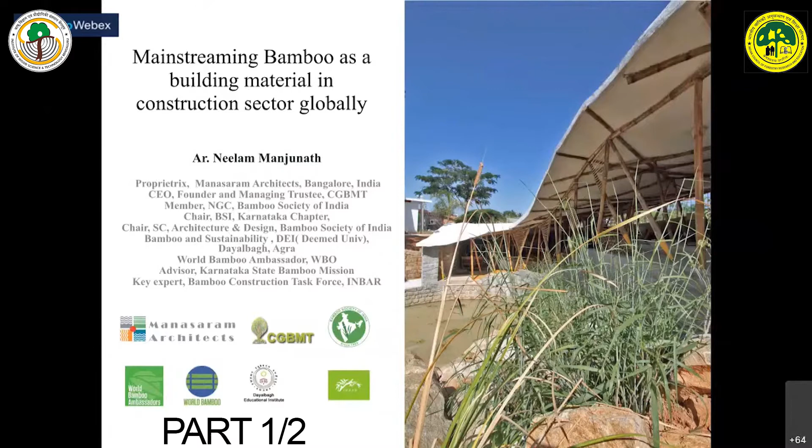Thank you. As Bansal sir said about the ecological and other benefits, the important thing is that bamboo is a traditional material, and we have been using it. Even now, about one-fifth of the world population lives in bamboo houses, though more out of compulsion than choice. Due to this, most of these traditional technologies have got lost. With the renewed interest in natural materials, bamboo has come up as one of the best alternatives and candidates for global construction, as we are all aware.

Any countries, when they show their skyline, show Manhattan skyline, or we show the Dubai towers, all that comes from concrete and steel. Unless until you count in metric tons and millions of metric tons, you are not considered developed. That's generally the general definition.

And because of that, this interest in bamboo has come. One more aspect which has happened is that most of the research on bamboo actually remains in the lab, as end-of-March projects where you have money left, you just do something, and then after that there is no interaction.

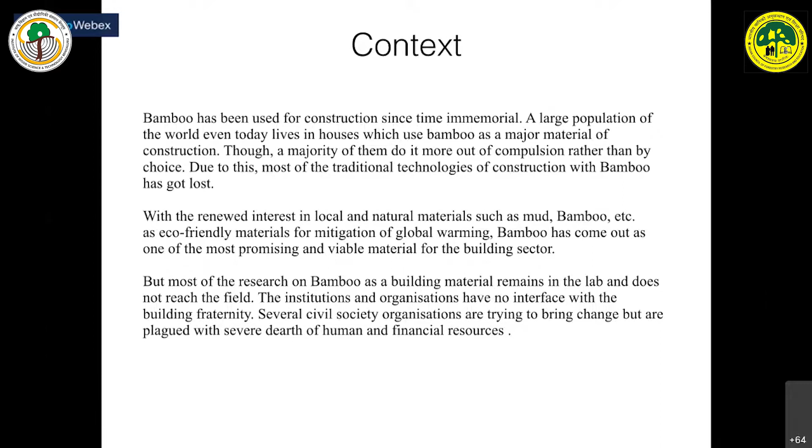When Bansal sir started, we started doing that. It was at that program. Dr. MP Singh approached me to invite architects to this program so that the institute's work and this bamboo and woodwork research happening could reach the fraternity. I was happy that all of them could be shared with, and I shared this with the professional fraternity, and this is why.

As the population density on the left and bamboo availability on the right show, wherever bamboo grows more, there is more population, and that's where more housing is required. The other tropical countries will see this happening in the next few years or decades, and that makes bamboo even more relevant.

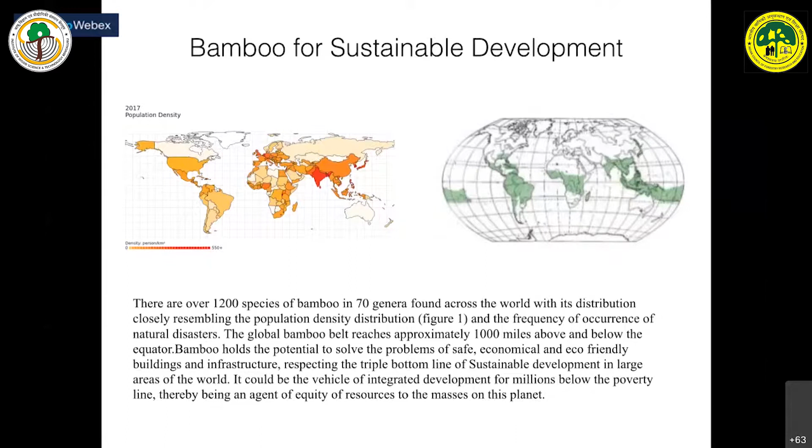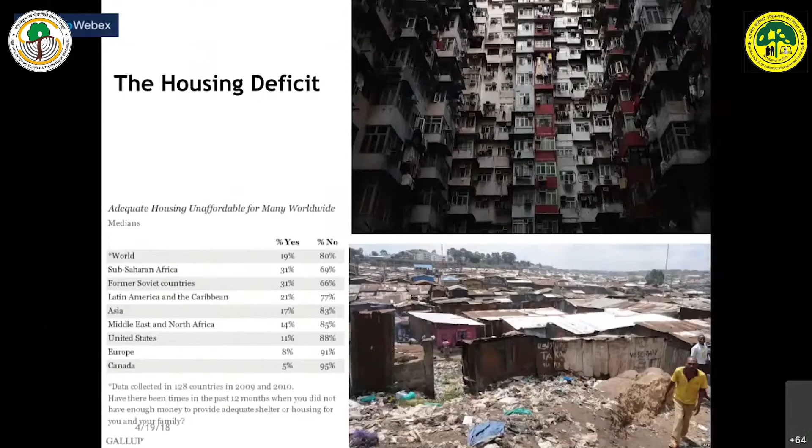This is nature's answer to us for how development should actually be addressed in the near future. An aspect which is really important is that it's a safe material to build with in disaster-prone areas, and we are having a lot of disasters, as you know, thanks to global warming that we have produced. That makes another case for bamboo to be used in the construction sector.

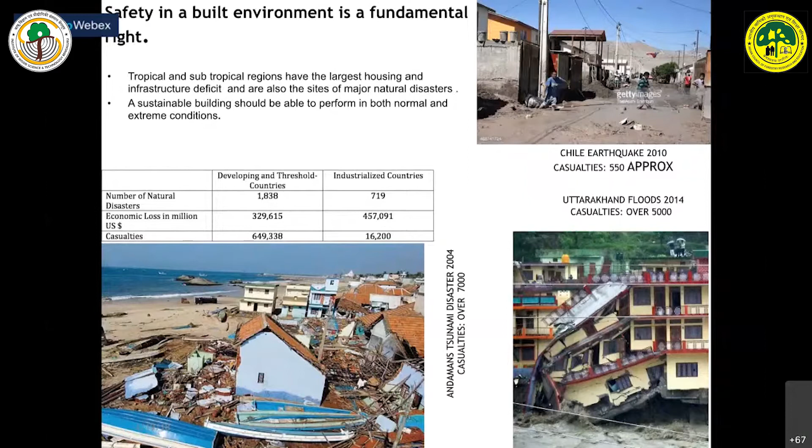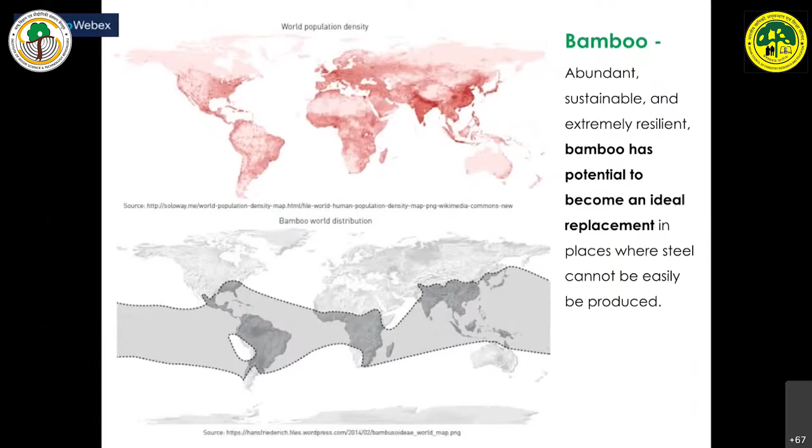Another thing is the housing situation, shown here in this comparison. This is the way the housing situation is, and this is again the comparison as to how it relates to the graph I had shared, that bamboo should be used for this.

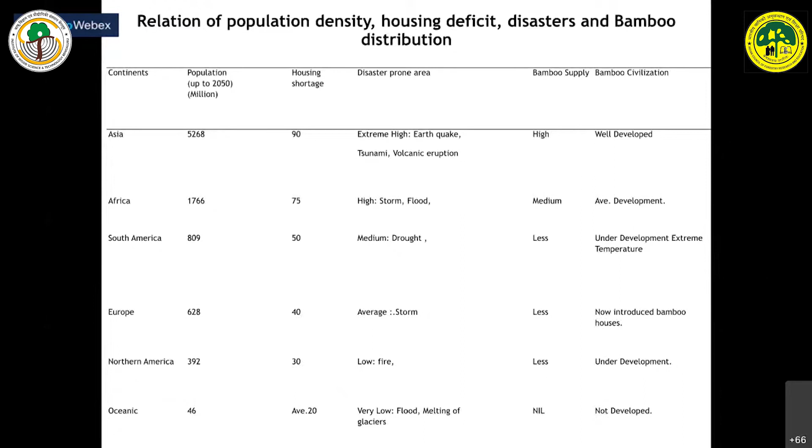This is another relationship table I have made, not just about housing but also disaster-prone areas. Where bamboo grows, those areas are more disaster prone, and that's where it's also more developed. So that's another case for why bamboo should be taken up very seriously in the construction sector.

There are the SDGs, which are a buzzword around the world. Every company puts it on their front page. These goals can actually address affordable and clean energy, decent work and economic growth, innovation infrastructure, sustainable cities and communities, responsible consumption and production, climate action, justice and partnership for goals. This makes bamboo another contender.

We use it for various sectors, including construction, without being polluting. So the mission I embarked upon, as I shared, after the first project and the second project that we did at the Plywood Institute campus, I literally became so enamored with the material and its versatility for various uses that it has become a lifelong mission for me to take forward.

It is the mainstreaming of bamboo in the construction sector. This also embarked me on a journey of not just working at bamboo institutions, but putting bamboo into private practice, professional practice of architecture. So I approached private clients, big private clients, and all these people, and that is how I have been making my efforts.

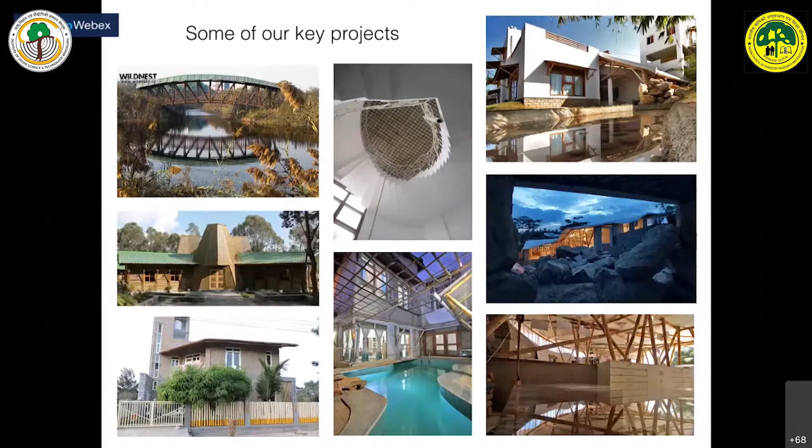For usage on a daily basis, different kinds of spaces, prefab house, Ipruti house - as you can see, this is the left compound. We have the 2-bedroom house at Ipruti, which is still being used.

This was my second project. The first one was in Raj Bhavan with Bansal sir. And in the middle at the bottom, what you see is a prefab house, 2004, in Rome, and it is still there. I visited it some years back, and it's doing very well.

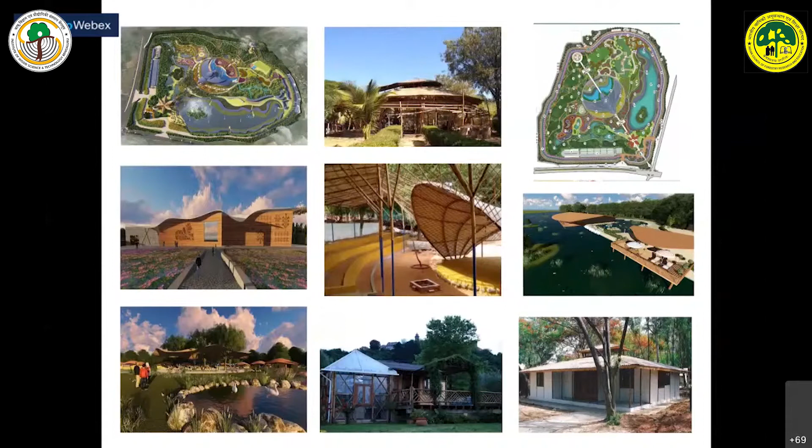It was prefab, and then I also started using it with other materials like mud, lime, and all these, which actually took us to high-end constructions, some of which are finished and some under construction. These are the various kinds of projects we are doing.

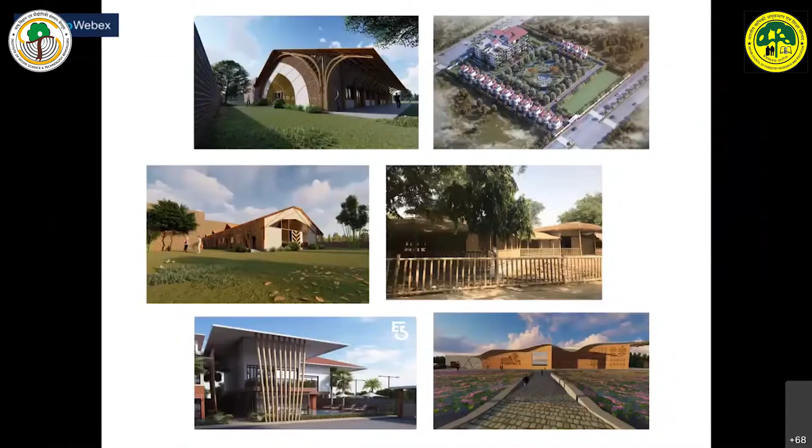We also made a presentation at Harvard University in 2010, at the executive program Construction with Future, at the Harvard Club, where we were with SARET - a network on how to solve issues with communities. I attended that program as well.

Then I programmed skill shops, and started a course in 2011, the bamboo application technology course. These are various activities we've been doing, just to try to see that bamboo comes to the construction sector in a big way.

At the top you see here, we have a panel from across the globe - we have INBAR, from Mauricio, from Rome, from Italy, from Hunar Bamboo, all connected with mud and other materials.

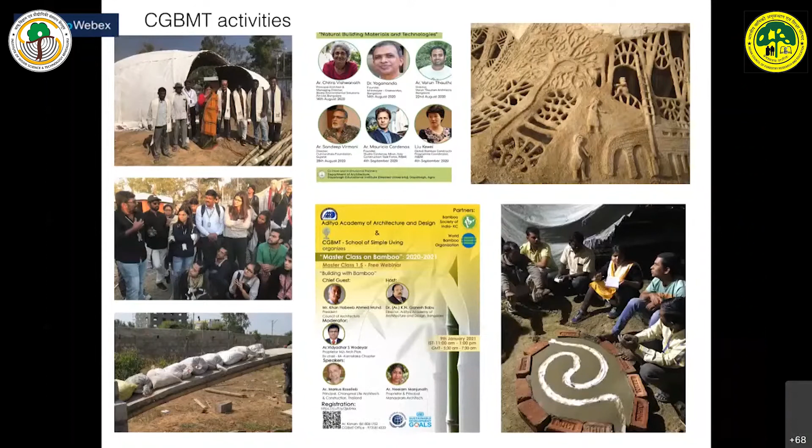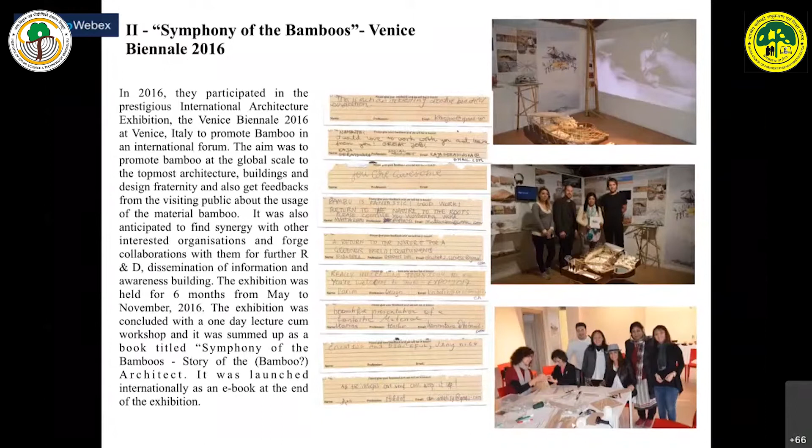This is the kind of work we did in Venice, and the things you can see closely are the comments that people have given, comments they left on our counter. We also had my first book launched - though the book was not very successful - Symphony of the Bamboos, launched in Venice in 2016.

This is also part of the same effort. Following this, we will understand how we should go about what to do to mainstream bamboo.

This is a global survey done by Bamboo and our media partners. With that, we did this, and we had 16 questions, and these are...

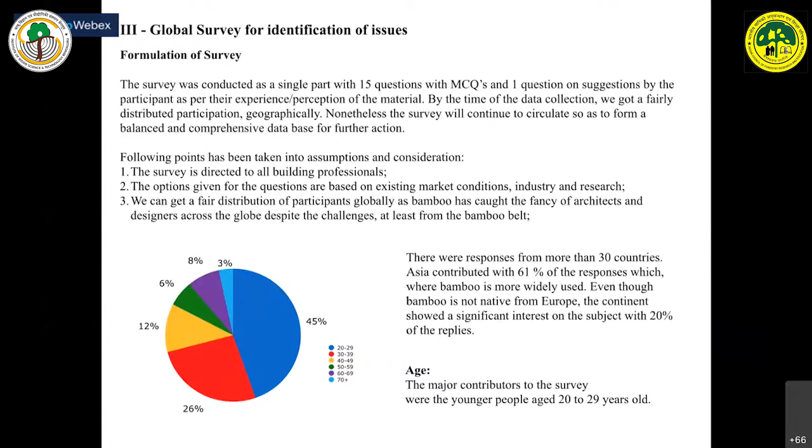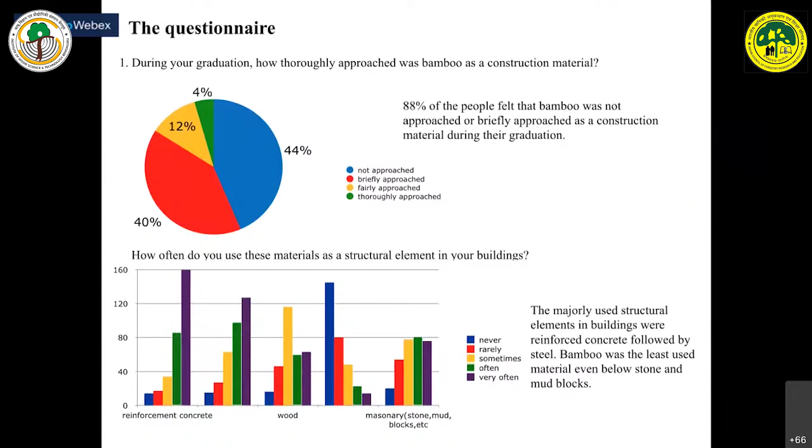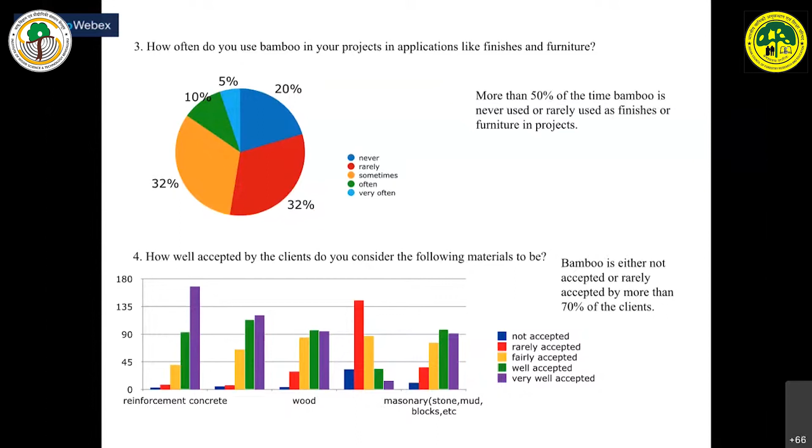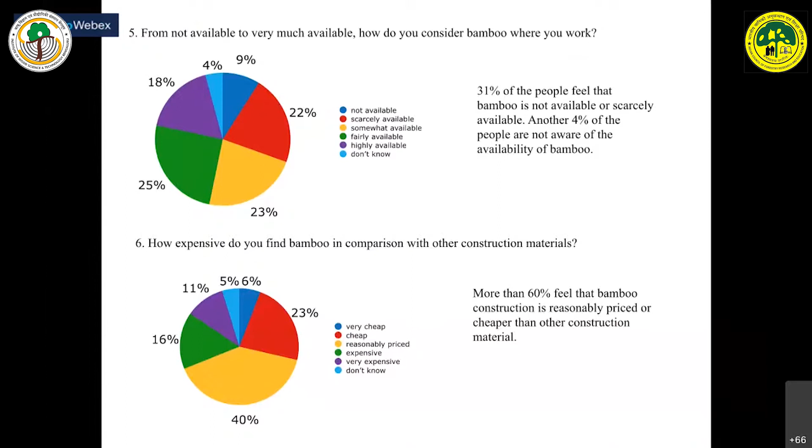Data entry - age group, profession, and on various issues, whether bamboo was addressed, whether you like bamboo, and what solutions you think should be used to actually work with bamboo. Whether clients would accept it, how much, whether you have done any work, comparisons with other construction materials. We did this whole survey and collated the demographic data with everybody, and whether it should be put into legislation.

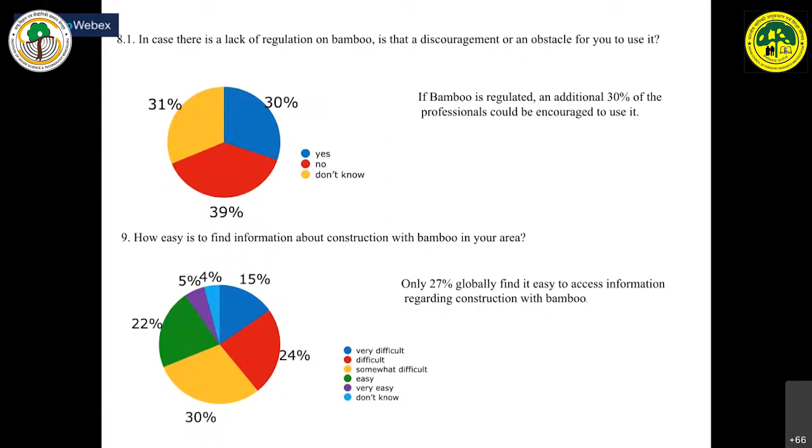This was a very detailed survey that we did. The participation from Asia was much more, but we had other countries as well, wherever bamboo is used. As a summary of the survey, I can present some conclusions.

Most architects and designers want to use bamboo but find several issues - academics, availability, and execution. Very few professionals cited the eco properties of bamboo for projects. These are important points because they want to use bamboo for fashion, since bamboo has suddenly become fashionable - and that is not our purpose.

So what happens is they would use it for the facade, for places where it is not supposed to be, and it creates more problems than others. Most of those inquired thought that bamboo could be bought at the current prices - they probably didn't realize bamboo could come so expensive to them.

But they preferred to get off-the-shelf products and components. They thought that a bamboo mart with some kind of bamboo certification would be a good way forward, because if they can buy bamboo poles and other products, they will be able to use them more frequently.

Most of the professionals think bamboo cannot be used for large buildings and complexes - they think it can only be used for temporary structures or resort villages, or to make small structures. And no architect talked about bamboo as a replacement for steel, for scale, or for replacing wooden furniture, flooring, doors and windows.